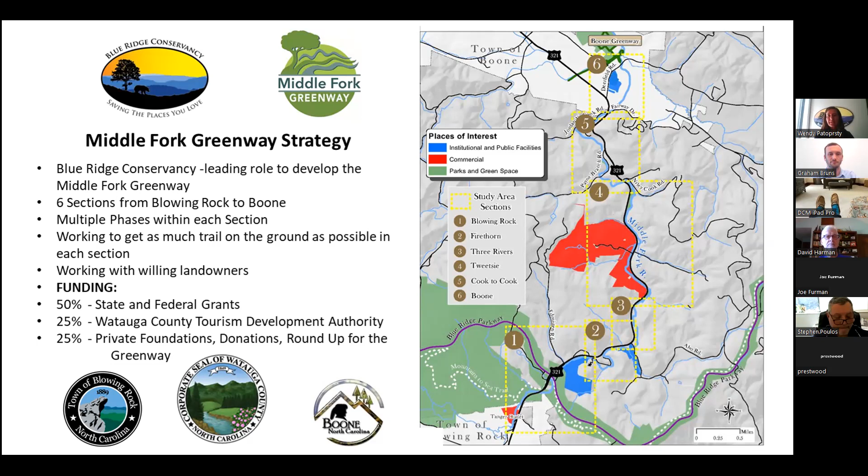An update on where we are with the Greenway: we've got 2 trailheads on the ground, one in Blowing Rock, one on Highway 321. The 321 trailhead was just constructed and finished last year. We're finalizing the planting next week, so the rain garden and landscape beds will be completed this month in May, once we're past the frost. These 2 trailheads set the precedent for what the Greenway looks like, its branding, so you know you're on the trail when you see those logos.

We have 3 pocket parks already developed: Payne Branch Park, where the dam was removed off Payne Branch Road back in 2020; Sterling Creek Park, with picnic areas and river access; and our most recent, Gold Mine Branch Park, which has parking that connects to the 321 trailhead. These are all already open and ready for folks to enjoy.

We have about 2 miles of trail on the ground, everything from asphalt to natural surface sections. They're already being used, open for the public to take their dogs, kids, strollers, and wheelchairs out to enjoy those sections of the river and the Greenway.

So far we've protected about 85 acres in the corridor through conservation easements and purchases. There's a variable number of what still needs to be acquired depending on the routes, and as you'll see in the next presentations, there are multiple different ways this can be conducted. We've acquired 20 tracts, and still need anywhere from 7 to 19 more to complete the Greenway.

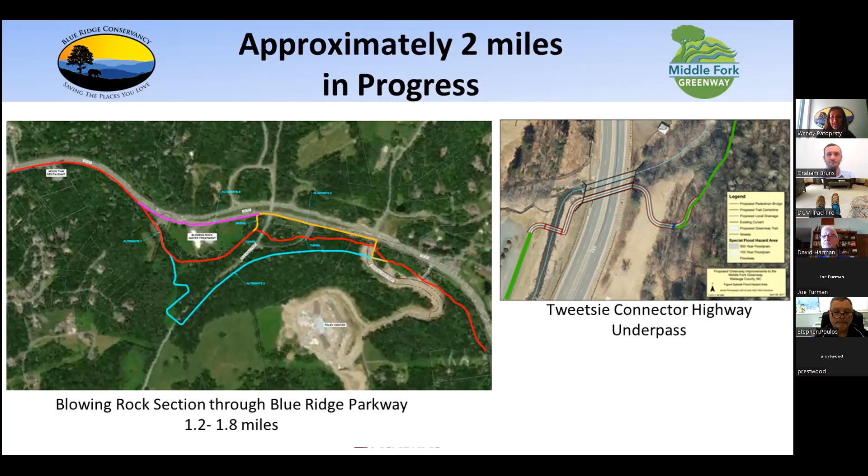Today's discussion covers 2 miles of feasibility studies funded by the North Carolina DOT and being conducted by McAdams Engineering.

One section is on the Boone side, from Appalachian Regional Healthcare's Watauga Medical Center, connecting to the Boone Greenway network, linking to Niley Cook Road where we just completed Gold Mine Branch Park — so from Gold Mine Branch Park all the way to the hospital is one feasibility study. The second goes from where Sterling Creek Park dead ends right now through Aho Road. That section is a bit smaller than the first, but it's complex and also really critical.

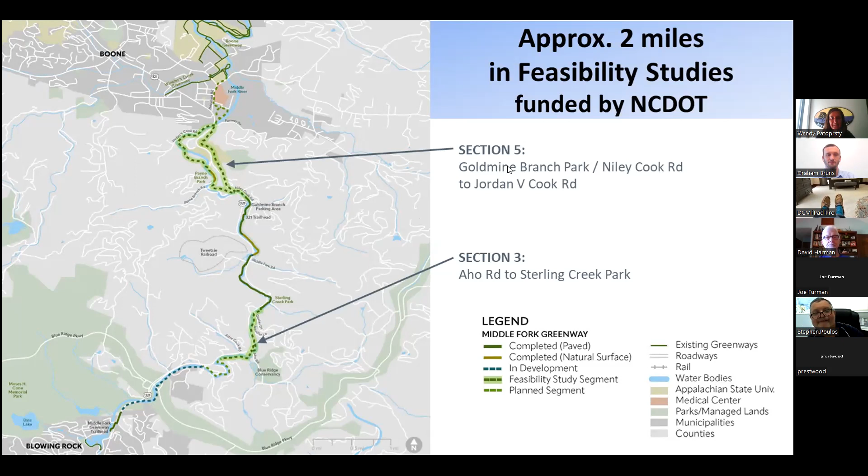I'm really excited to have McAdams present on what a feasibility study is and our next steps with this. I'm going to stop sharing and pass it over to McAdams Engineering for their presentation.

Thanks, Wendy. Can you hear me? Yes. Alright, let me share my screen real quick.

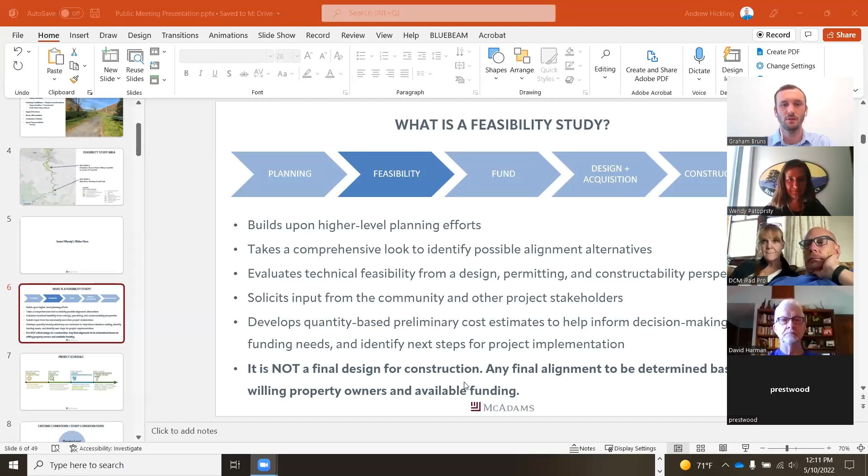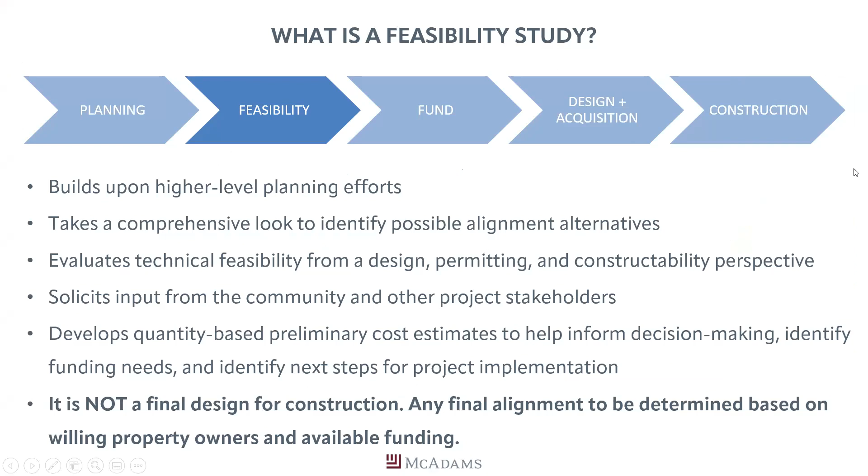My name's Andrew Hickling, I'm with McAdams. We've been working with NCDOT and Wendy on the feasibility study.

I want to take a quick moment to go over what a feasibility study is and where it fits in the overall life cycle of a project. You can see the life cycle up at the top there. It starts with planning. Feasibility is kind of in between planning, funding, and design, and then, of course, construction at the end.

We're building upon higher level planning efforts. Planners have come up with your master plan. Now it's time to bring in some engineers to vet some of those fat lines and understand how much they're going to cost. So we're going to take a comprehensive look to identify possible alignment alternatives, evaluate those from a technical feasibility standpoint, both from the design, permitting, and constructability perspectives, and solicit input from the community and other stakeholders on those alignment alternatives.

And then we're going to develop quantity-based cost estimates. At the planning level, you might get a cost per mile, a big fat line type cost estimate, but we're going to actually model these alternatives and use those to develop actual quantities, using that with bid tabs from other recently bid Greenway projects to get a better estimate of what each alternative would cost, to help inform decision-making, identify funding needs, and identify next steps for project implementation.

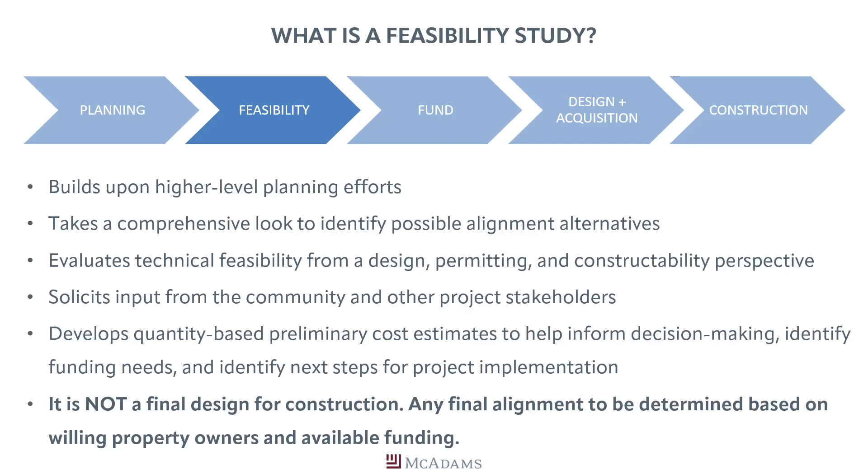When we look at a feasibility study and the existing conditions, what we're trying to consider falls into three buckets: the planning level, natural environment considerations, and the human or built environment considerations. Starting with the planning level considerations, these are the higher level considerations.

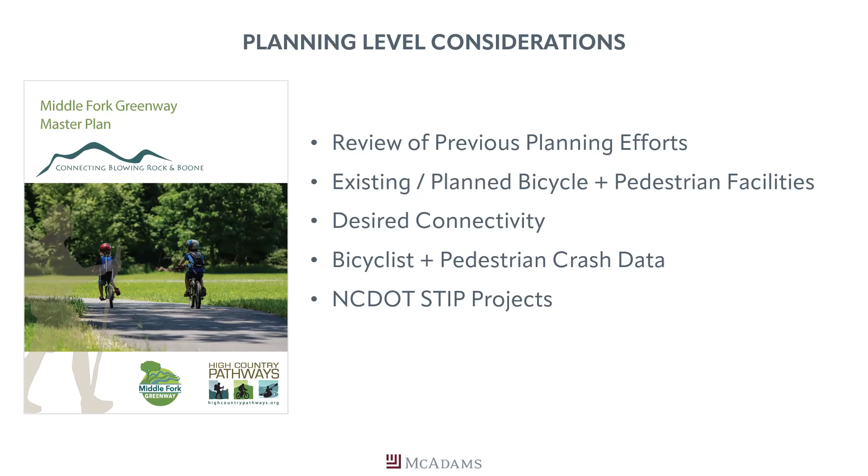We start with a review of the previous planning efforts. That would include the Middle Fork Greenway master plan you see on the left, but also any other plans, looking at existing and planned bicycle and pedestrian facilities in municipalities along the corridor, revisiting desired connectivity to make sure we're hitting the mark, understanding bicyclist and pedestrian crash data, and looking at the NCDOT STIP to see if they have any projects in the corridor that might accommodate certain segments of the Greenway.

We move into the environmental and more human environment constraints. We're looking at topography, a very big constraint, and also the state's jurisdictional features—could be rivers, streams, wetlands, that kind of thing. Also the trout stream buffer—Middle Fork is a trout stream, so there are certain buffers and undisturbed areas associated with that.

Looking at the FEMA floodway and floodplain—there are already insurable structures within the floodway along sections of the river. So anything we do can't create a rise in that floodplain elevation or have any impact on those existing structures. Also property impacts, land acquisition, that kind of thing.

Utility impacts, both aerial, like power lines, and any underground utilities, whether sanitary or gas. Roadways in the corridor—when we need to get across them, we're looking at things like traffic volume, speeds, and sight distance. Structures—bridges, boardwalks, tunnels, and walls—knowing where and if we need those, because those can drive the cost of the project up rather quickly.

Constructability—not just looking at whether the line fits on the page, but how do you build it. So understanding the amount of room it takes to bring a crane in, have a staging area, set a bridge, that kind of thing.

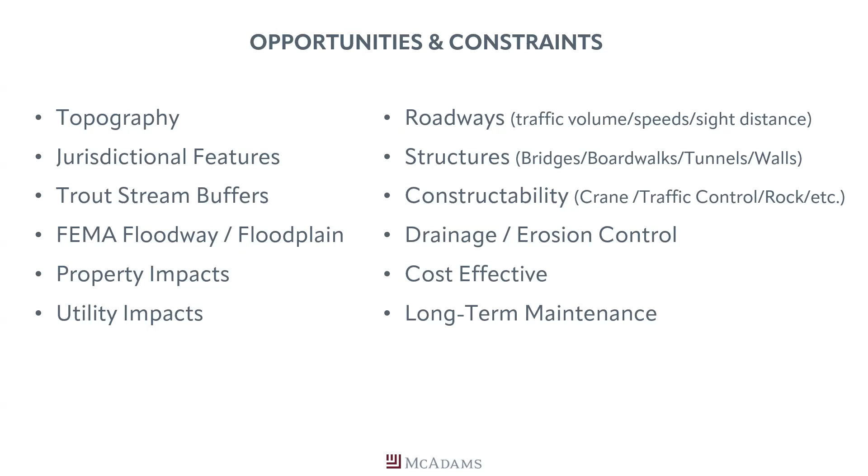Understanding traffic control that might be required on any roadways during construction, and understanding if there are any geologic features like rock that would be harder to excavate. Drainage and erosion control, so we want to make sure that everything drains well and doesn't create problems for adjacent landowners. Cost effective, always trying to keep that hat on, and then long-term maintenance - not just looking at the quickest way to get it on the ground right now, but making sure that what we put down is going to last and not become a large maintenance burden.

So those are the kind of things we were looking at and had in mind when we did our field visit last fall with Wendy and Joe and the rest of our team here at McAdams. I wanted to share some of our field visit observations and how they relate to those opportunities and constraints I just shared.

Next slide here, we've turned around and now we're facing north. On the left-hand side you see the Aho Road Bridge that NCDOT replaced. You can see a bench on the left-hand side underneath - we would look to grade and utilize that bench, so we'd have a grade-separated crossing there.

On the right-hand side, this is just as you pop out the other side of the underpass and turn to the west looking towards 321. You can see when NCDOT replaced the bridge, they raised the roadway grade on the approach there and had to put back the entrance, and it's rather steep. So that's a constraint if we were to try and go in that direction with the trail that we'd have to deal with.

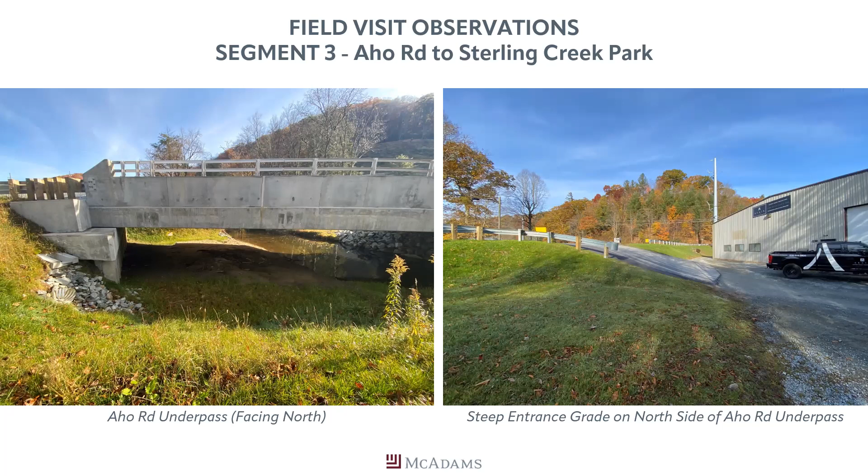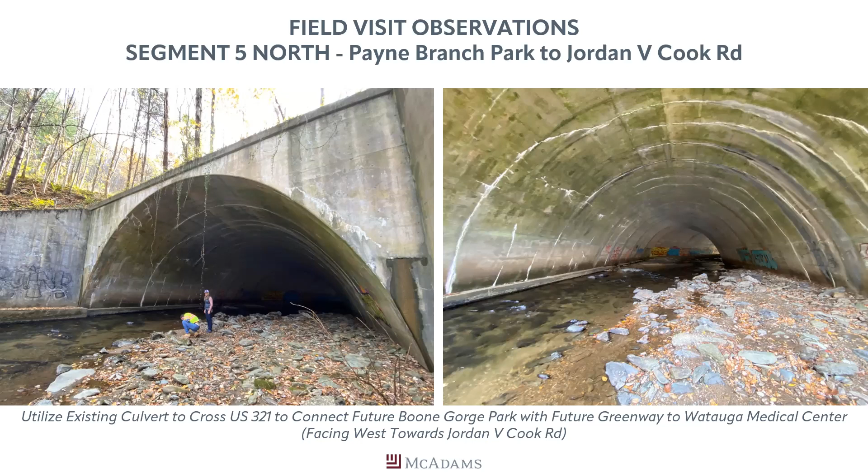And with that, I'm going to turn it over to Jimmy. He's going to talk you through the typical cross sections and then some of the route alternatives that were developed based on all of the observations we just went through.

All right, thanks Andrew. Can everyone hear me okay? Yep, awesome. Well, I apologize, I'm not on video, I had some technical difficulties, but I'm just glad to be here in some capacity. So as Andrew mentioned, I'm going to take over and talk about some typical cross sections we've developed, as well as pull up some maps and show you some route alternatives later on.

Based on all these opportunities and constraints, as well as the field observations Andrew ran through, we've had the chance to develop both of these, and we're excited to show them to you.

So we'll start with the typical cross sections. We have 4 to show you today: 2 for the main line, a preferred and an alternate, and 2 different types of structures, a boardwalk and a pedestrian bridge.

We'll start off with our mainline preferred. This will be a 10-foot wide paved trail, recommended basically because long-term maintenance is a lot less, and it also has greater eligibility from a wide variety of funding sources, as mentioned before.

There are 2 different types of pavement that could be used on this preferred section, both asphalt and concrete. Asphalt would be used along the majority of the length, recommended based on site conditions, anticipated trail use, as well as cost considerations. There would be limited sections of concrete, such as areas under underpasses or areas where flooding might be more likely and higher velocity waters might interact with the trail, since concrete tends to hold up a little better in those situations.

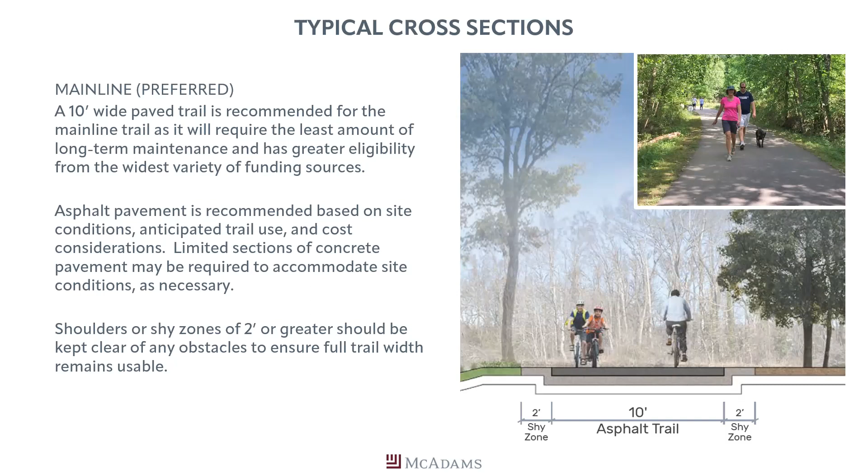If we look over to the right, you can see a generic rendering of this. You can see a 10-foot width, and on either side of the 10 feet there's a 2-foot shy zone or shoulder. These are to help keep the trail clear of any obstacles and ensure the full trail width remains usable over its life.

Next we'll go to the alternate mainline section, which is a slightly narrower 8-foot wide natural surface trail. Although the initial cost is going to be a little cheaper than a full paved trail, the overall life cycle cost may be a little higher due to more maintenance being required, due to environmental factors such as surface drainage and things like that.

As mentioned, a 10-foot paved section has the widest availability for funding. That doesn't mean this 8-foot natural surface section is not eligible. However, you could utilize primarily local and/or private funding for these sections, and utilize labor forces as funding and real estate constraints allow.

Over to the right, you can see an 8-foot compacted aggregate trail. If you look at the real life image in the top right-hand corner, this is the type of surface you might be used to seeing in some parks. It's great for hiking, and it's also possible to ride a bike on this. Same as with the 10-foot section, you can see a 2-foot shy zone or shoulder on either side.

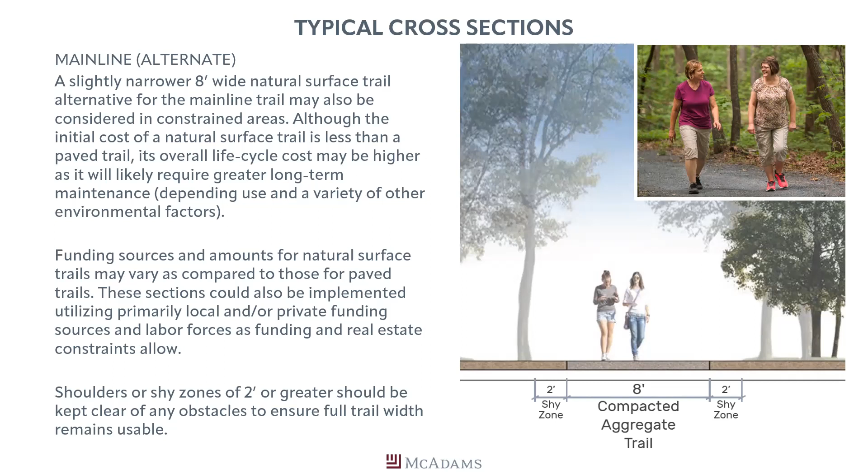Now we'll move to the first structure, which would be a boardwalk. This would feature a 10-foot clear width from rail to rail. It will be used in situations such as crossing wetlands, approaching bridge crossings in the floodplain floodway area, which occurs frequently over the course of this project, and also in areas where you cross steep topography, which is very common. It essentially allows you to limit your 2D footprint and reduce limits of clearing and grading.

The deck surface for these boardwalks would be concrete, because it has greater friction and reduces the risk of falling and slipping. Overall long-term, there's not as much burden with maintenance compared to materials like timber when you use concrete. So this would be a primarily timber structure aside from the concrete deck, with timber safety rails and handrails as shown on the right, as well as a timber pile substructure system. Just a disclaimer, the substructure design and materials do vary depending on specific site conditions and geotechnical recommendations further down the line.

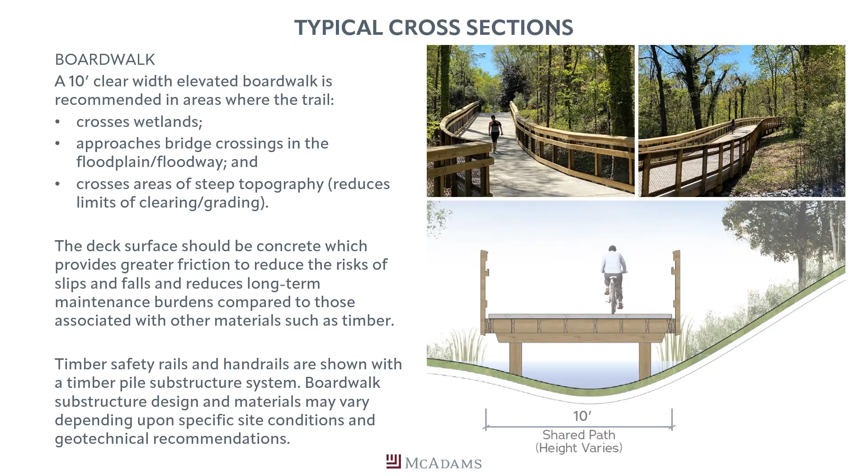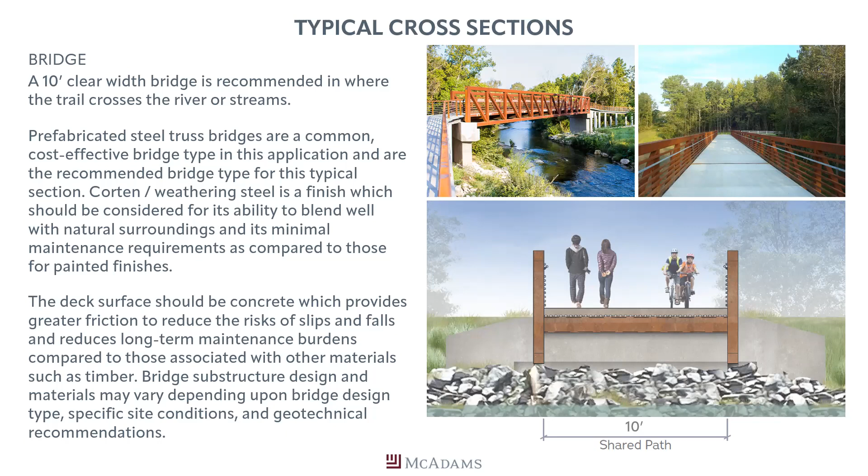Over to the right, you'll notice a rustic red tint to this bridge. This is actually not paint - it's Corten weathering steel, a finish that should be considered for its ability to blend well with the natural surroundings, and also has minimal maintenance requirements long-term compared to bridges that are painted. Just the same as the boardwalk, we would recommend a concrete deck on these bridges. Along with the same disclaimer, the bridge substructure design and materials vary a lot depending on the bridge design type, specific site conditions, and geotechnical recommendations as well.

So those were our 4 typical sections. Now we'll move in and look at some maps and show you some route alternatives. Essentially, for each section, there are these miniature segments that you combine in different ways and then come up with an overall alternative.

For section 3 on the southern end, we have 6 alternatives to show you. For section 5 south, we also have 6 alternatives. And for section 5 north, the furthest north section, we have 1 recommended route to share with you today. Andrew will get into this a little bit more later, but we'd like to let you know this will all be open for feedback until May 20th. Your feedback on these alternatives is vital and much appreciated.

So we'll go ahead and get into these maps. Just to orient us, over to the left you'll see a map with a predominant color - in this case, red. It'll change throughout the different alternatives, but that'll be the highlighted alternative we'll focus on. You'll also see some dashed gray lines - those are the smaller segments that can be pieced together and will be part of other alternatives later on. To generally orient us, the solid yellow-orange line through the center is 321 for this section, and the Middle Fork River is light blue. Each alternative on the screen will be a solid color. So let's bring attention to some of the differences in this section, between Aho Road and Mack Hampton Road.

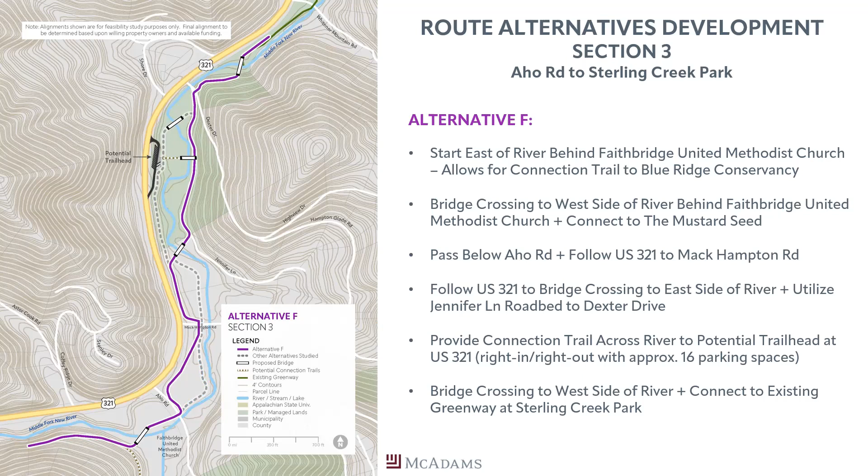And then that will continue up to eventually tie down into Sterling Creek Park. So those are our 6 alternatives for section 3.

Now we'll move further north up to section 5 south, which will cover from Goldmine Branch Park, Niley Cook Road, up to Payne Branch Park. As compared to section 3, the scale of this section is a little bit larger, so we did want to break section 5 into both the north and south portion.

So just to orient ourselves, the biggest constraint with this section is crossing 321. We want a grade separated crossing, and we have 2 alternatives that bring us up to a pedestrian bridge crossing over 321. We also have some options that bring us to the pedestrian tunnel, near where the Middle Fork River currently crosses under the existing culvert.

Looking at alternative A, this option starts at Goldmine Branch Park. Instead of following along the river, we see an at-grade crossing at Niley Cook, then begin to follow the terrain up Mine Branch Road, cross at grade at Mine Branch Road, and continue climbing up to eventually set up that pedestrian bridge from high ground to high ground over 321.

Once we cross to the west side of 321, we descend down parallel to 321. On the first 3 alternatives for this section, as we descend from 321 down to Payne Branch Park, there are 2 different switchback alternatives. The same amount of elevation is descended, but with 2 different approaches: one where you descend and approach a mid-block crossing of Payne Branch Road from the south or west, and one where you approach from the north.

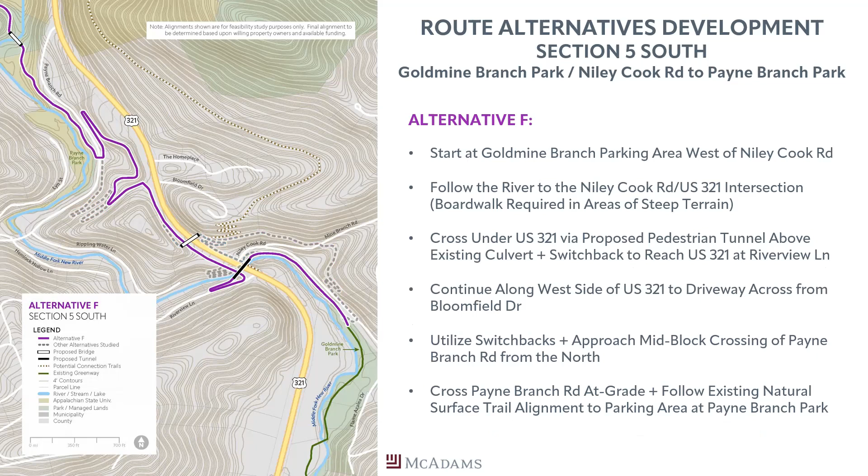So those are alternatives for section 5 south. I think now we'll move into section 5 north, where we have a solid green line here, no alternatives to show you, just a recommended route. So this on the bottom of the screen is kind of where our last one ended there at Payne Branch Park. So the alignment here will start there.

We'll set up a bridge crossing to the west side of the river, and then between bridge to bridge here, we'll follow the mountain terrain, kind of say high and dry is what we like to say, and avoid any stream buffer impacts, avoid any direct interaction with the river.

And ultimately, we'll have another bridge to cross over to the east side and descend down into Boone Gorge Park. And once we get into Boone Gorge Park, we kind of follow the bottom lands and connect to a potential trailhead, which you'll see as the solid black area here, which we believe can accommodate anywhere from 50 to 60 parking spaces.

And there's also the potential to have loop connections and a trail system throughout the park that takes you down to interact with the river more through here.

So leaving Boone Gorge Park, we actually use a pedestrian bridge that's adjacent to the existing Old Blowing Rock Bridge, which Andrew mentioned before, is very narrow and unlikely to accommodate pedestrians and bicyclists safely. So setting this new bridge up next to that, you cross over to the west side of the river.

And then from there, you follow along Jordan V. Cook Road between the road and the river with a boardwalk system that ultimately descends under that beautiful arched culvert under 321. And then you come out and connect up to the Greenway that will wind up at the Watauga Medical Center.

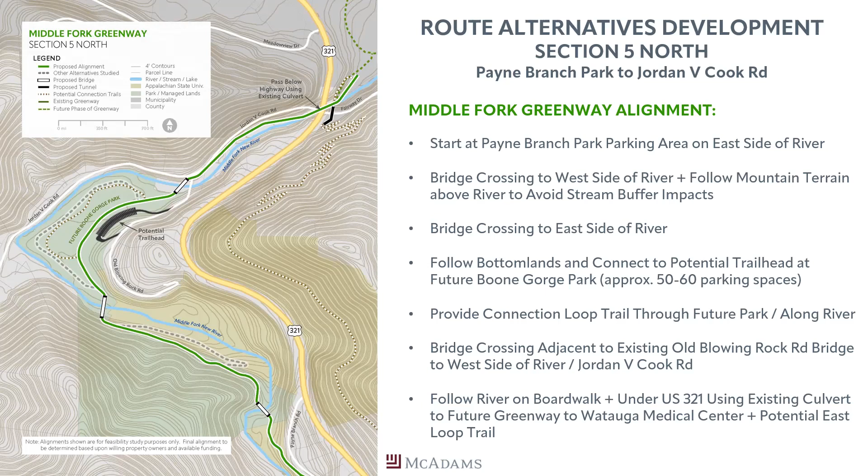So those are all of our route alternatives, and I'll go ahead and hand it over to Andrew. He'll talk about the evaluation criteria. Thanks, Jenny. Can you guys hear me?

All right. So now that we've gone over the route alternatives, we need to have a way to evaluate those. So I wanted to touch on a few of the things we look at when evaluating them and figuring out what recommendations to make. The first is cost. So not just how much it costs to construct, but the total life cycle cost, including design, permitting, and ongoing maintenance.

The next one, property impacts. So how well does the alternative use existing publicly owned properties, existing easements, public right of way, and how much can it limit impact to private property owners.

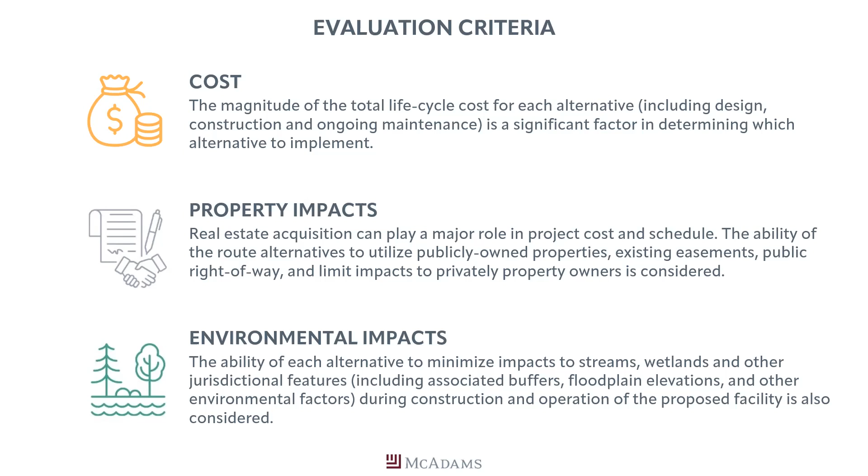The third one there at the bottom are the environmental impacts. So what is the impact each one of those alternatives is going to have on streams, wetlands, and other jurisdictional features? That includes things like the trout stream buffers, as well as the floodplain elevations.

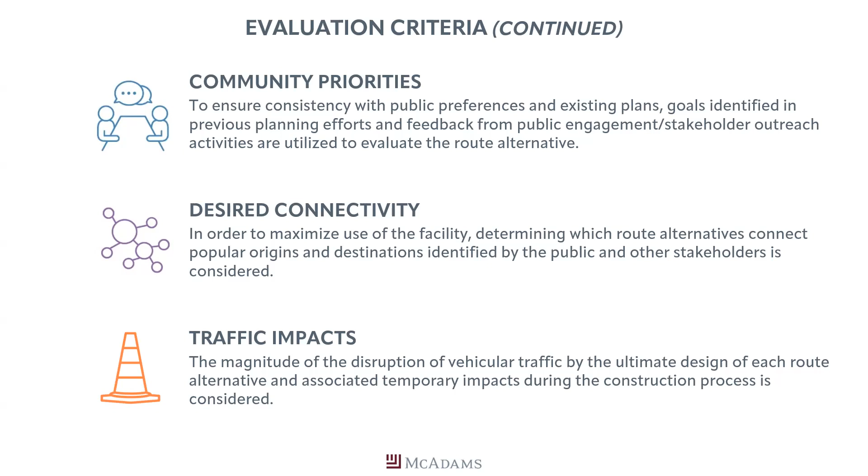Traffic impacts - probably not as big of a deal on this one compared to some of the other bike ped projects where you're proposing road diets with dropping a lane of traffic to accommodate bike ped. Here, it would be more about the temporary impacts and traffic control, primarily thinking about section 5 south there. Obviously, the impact of digging a cut and cover tunnel would be greater than setting a bridge across.

Implementation timeframe - each one of these, relative to one another, can take longer to plan, fund, design, and ultimately construct. So I want to take that into consideration in conjunction with community priorities and what the expectation is for how long is a tolerable time to wait for overall project completion.

Accessibility - that's a really big one. So convenience of use and being able to accommodate users of all ages and abilities. We want to make sure that what we ultimately put down is a community amenity that is designed for universal use and can be used by all.

And then lastly, here we have placemaking and user experience. Certain alternatives might be more visible to passersby on the traffic there. Others may stay further away, but we're trying to think about the ability of any of these alternatives to help drive tourism, contribute to the local economy, and really brand the surrounding area as one that promotes healthy, active lifestyles, which I think the existing sections of Middle Fork Greenway are already doing a great job of.

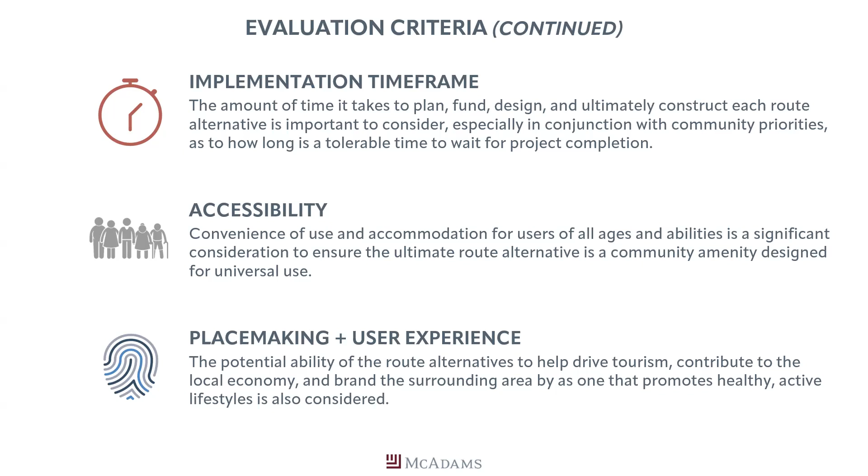In the report, you'll see an evaluation matrix. What this does is lay out all the alternatives across the top, and then down the left-hand side, you'll see all the different evaluation criteria. We'd go through and rank or score these based on each of those criteria - high being the most desirable, medium, and then low being the least desirable. So this will provide a quick at-a-glance view of the pros and cons from the perspective of all the different evaluation criteria, so you can compare all of them at once.

There's already a link there ready to go. That survey includes a little exercise for you guys to prioritize those evaluation criteria so we can understand which of those is most important to you. There's an opportunity to review the maps with the different route alternatives that Jimmy went over and provide any comments on those alternatives. And then there's also some questions for general project feedback and any other comments you might have.